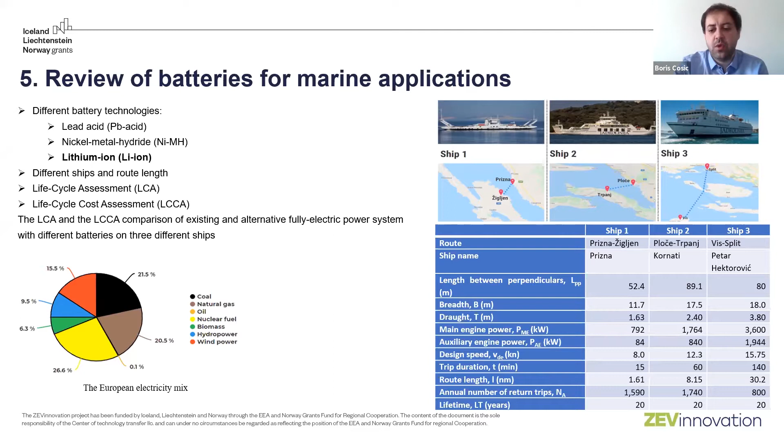We used the European electricity mix, so it's on the European level. If you go for the national level, of course, there's no problem. Our idea was to see how much everything costs, what the influence is, and to compare across different ships and different routes.

If you look at the CO2 emissions results, batteries of course reduce emissions. You don't have emissions from operating the ship, but you have a lot of emissions in production because we use the European mix. If you go to 100% renewable electricity, these CO2 emissions will probably be reduced.

This is the result of the analysis for ship 1, 2, and 3. As you can see, nickel batteries have a lot of SOX emissions because of the manufacturing process. The most important thing is also the LCCA comparison.

So you can see for ship 1, 2, and 3, operation costs are lower, but here we face the problem of battery size - it's like 8 megawatt hours for the batteries on ship number 3. This is the actual comparison between short and long ships, showing what happens when you analyze the system.

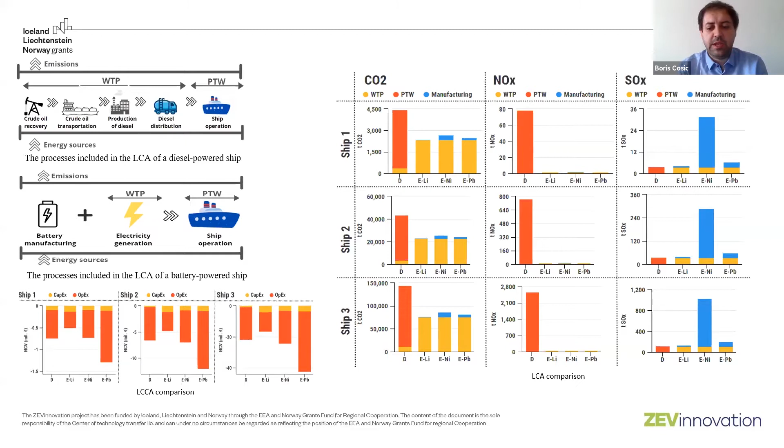Because of that, our next presentation will cover first electric ships, typically used for shorter destinations, and Anders will present after that batteries and hydrogen - how to work and design your system, and what other options exist beside batteries and hydrogen. So this is it for me for the introduction.

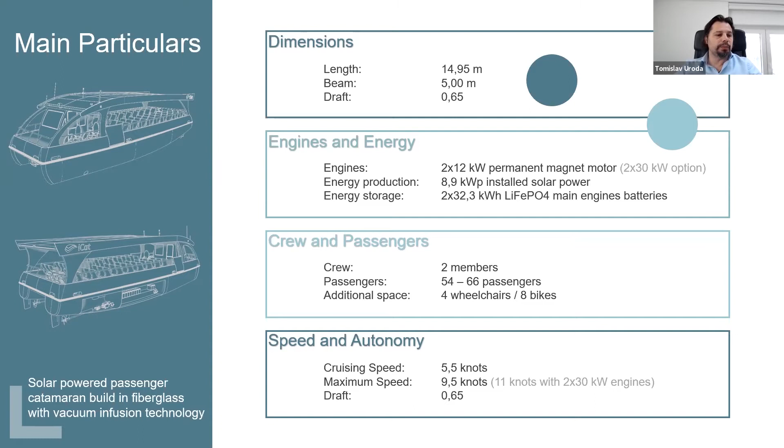That's mostly the speed of the cars, and sometimes it would be needed for improving the vessels as well. This small vessel is the Catamaran, 15 meters length, 5 meters wide, and it has small engines, 2 times 12 kilowatts. We can upgrade that to high power, but the basic idea here was to have a self-sustainable vessel. With those small engines, optimized hull resistance and the weight of the vessel, we have a cruise speed of 5 to 6 knots and maximum speed almost 10 knots.

On the screen here, you will see some data about this vessel. The name of that one was Baby Cat. Solar Cat is the third generation, which follows the Baby Cat vessel, as I told you before.

On the screen, you can see deliveries of new building number 2 and number 3. New building number 2 was delivered in summer 2019, and we have been sailing from Split to Mljet. This is a distance of 75 nautical miles. We were sailing 13.5 hours with an average speed of 5.5 knots, and the batteries at arrival remained at 50 to 60%.

Then we have the midwinter delivery. That was early January 2020. Same speed, not the same distance - the distance was 62 nautical miles, 11.5 hours of sailing, meaning sailing without stopping. And then we drained the batteries almost completely, some 90%.

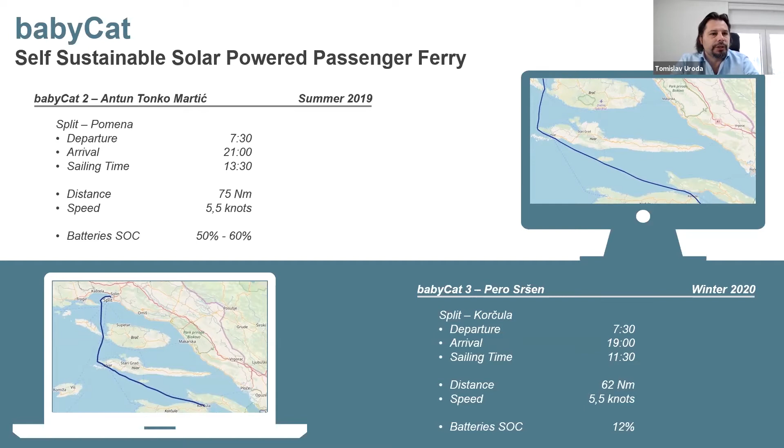The Solar Cat, which is the next generation of that vessel, has 30% more power in the batteries and 20% more in the solar panels. Emphasizing on those vessels is the solar energy. So they are sailing in a national park for some years already, and they never recharge them. The only energy they need, they get from the sun.

This is the second concept of the vessel we have designed, and that would be the next one for us. This is the fast electric ferry. That means we are not using solar energy here because the roof space is pretty small with regards to the amount of energy we needed for that vessel. But on this one, we have designed a speed of 25 knots as top speed, and then we have changed battery technology.

Aiming to have batteries which are able to have high C rates with regards to charging and discharging, that means you can recharge them in some 10 minutes of time, and that would be the time when you are boarding and in between some stops.

Such a kind of vessel is the vessel for short distance, meaning distance up to 20 nautical miles - but I would say not 20, more like 10 to 15 nautical miles. If we take a look at the Adriatic, it will be in between the islands. It will not be for the further islands we have in the Adriatic, but island connections in between. That will be the perfect ferry, or it could be part of public transportation. In Norway, that would be the fjord connections.

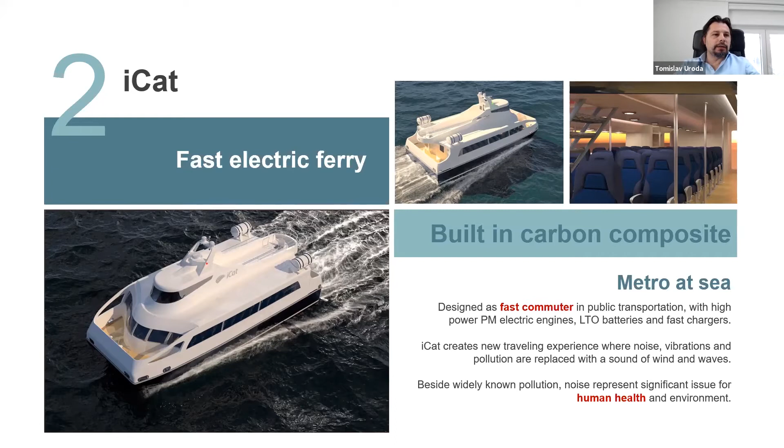On such a vessel, at this moment, with the technology we have, I would say this is the utmost you can use for the batteries. And then the third concept would be a combination of batteries and hydrogen. This is the project idea we are developing at the moment with the University of Zagreb, and it will be our third step.

The electric vessels are kind of more pricey than the normal classical diesel internal combustion vessels, and it's kind of similar with cars. If you're buying an electric car, it's twice the price of a normal car. And here it's very important - the message you are sending to the market and to the customers.

Probably didn't get the sound on it, but it's a short commercial about the electric car. Basically it's not promoting the electric car, it's saying what would happen if everything would run on gas—from general home appliances to all the systems. And then this is the market approach.

If you take a look at the past and quote some famous people, there's Henry Ford, who said, if I'd asked customers what they wanted, they would have told me a faster horse. Or Steve Jobs, who said that people don't know what they want until you show it to them. That's why I never rely on market research. Our task is to read things that are not yet on the page. I'd say the topics we're discussing now are right on the same track as those guys in the past.

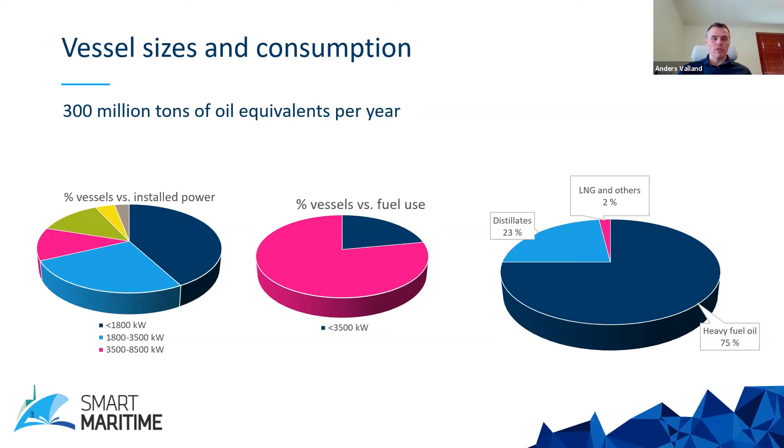And if you look at this small slice of 2%, LNG and others, that's where you find LNG, methanol, LPG, and batteries. You couldn't show batteries separately in this because it wouldn't basically show in this figure - it's that small yet. The other figure that's quite interesting is the middle one - it's set up as a percentage of which vessels have huge engines. It basically says that approximately 30% of the ships in the world use approximately 80% of the fuel, and these are the 30% biggest ships. So that's where we need to really get going if we want to reduce greenhouse gas emissions.

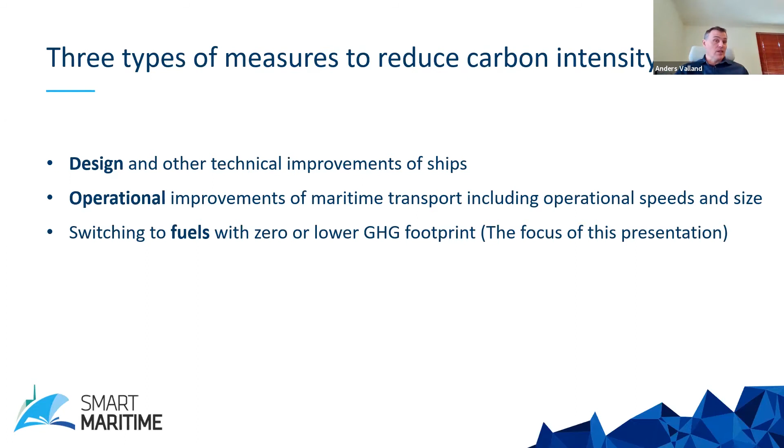Now there are basically 3 types of measures to reduce carbon intensity. You could do something on design and technical improvements of the ship. You could do operational improvements in how you utilize the ships and their capacity, or you could switch to fuels with either zero, low, or very low greenhouse gas footprints, for instance, as batteries. And this is what I will be talking a little bit more about.

It's also good to know what's happening with the International Maritime Organization and ship emissions and climate impacts. Presently they are regulating nitrogen oxides and sulfur oxides, and these are human health and local pollution issues.

And they're quite big. Shipping in total globally stands for about 15% of all local air pollution on this planet. 15%. While on climate gas, it's 3%, 2 to 3%.

The IMO prohibits deliberate emissions of ozone depleting substances, and it regulates CO2 emissions through the MARPOL Annex 6. And it's also important - the IMO regulations are on what we call a tank-to-wake basis. So it's the emissions that come from the ship alone, from the fuel that's on the ship, and that's what IMO is looking at.

But they are now getting under increased pressure to also include other gases than CO2 into greenhouse gases, for instance methane and laughing gas, N2O. And they're also under pressure to include what's called a life cycle analysis on the fuels on a well-to-wake basis - that is, from the production of the fuel all the way until the energy is dissipated through the propeller.

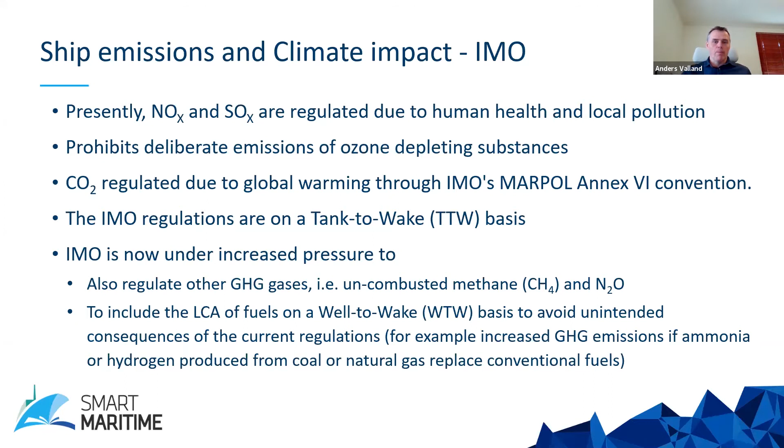So this is quite important. If you look at this figure, it illustrates the difference between what we call the tank-to-wake and the well-to-wake. Looking at tank-to-wake and CO2 only as IMO does today, and the well-to-wake looking at CO2 equivalents.

In the upper figure, you will see that LNG, for instance - and LNG is a highly debated topic these days - will give you approximately 24 to 25% reduction of greenhouse gas emissions compared to marine gas oil, if you look at the tank-to-wake and CO2 only perspective.

If you include what's known as the well-to-tank, so the production and distribution emissions for the fuels, you will see that the figures are different.

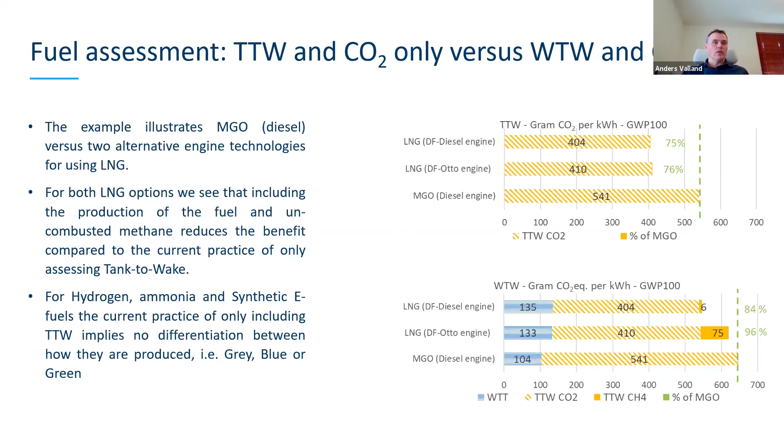So what we call the dual fuel Otto cycle engine on LNG has approximately a 4% benefit compared to marine gas oil, while in the previous figure it had a 24% benefit. While the dual fuel diesel cycle engine has approximately 16% benefit compared to marine gas oil, if you look at the well-to-wake, compared to what the IMO is doing today, where it looks like it has a 25% benefit.

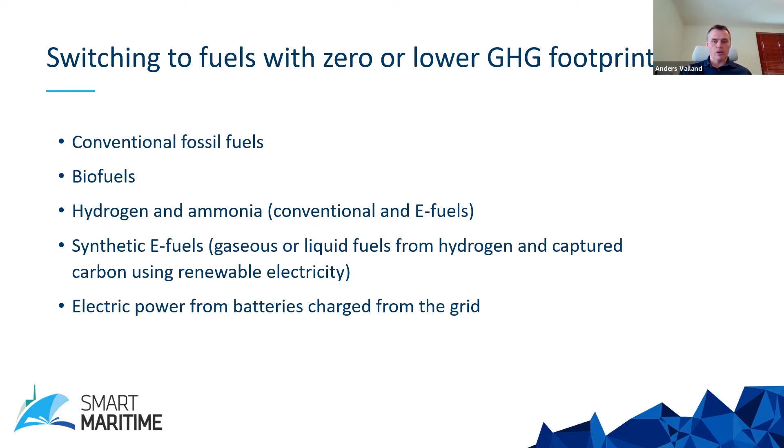Switching to fuels with zero or lower greenhouse gas footprints, we can go all the way from conventional fossil fuels - I've already shown you that some of them can actually give lower greenhouse gas footprints. We can look at biofuels, hydrogen, ammonia, and synthetic e-fuels, synthetic fuels, or electric power from batteries charged from the grid. Now, the electric power was covered in the other presentations, so I will not go much into that.

But I will try to show you some figures on these conventional fuels and how they can compare to what's going on today. So we're always comparing to marine gas oil, or low sulfur heavy fuel oil. In these figures, you see the vertical dashed green line is the marine gas oil on a diesel engine, and that's what we call the 100% - that's the emission basis that we're looking at.

If we look at a marine gas oil on a dual fuel Otto cycle engine, it has an increased emission because it uses more fuel. It's less efficient than the diesel engine. This is known. If we look at this picture, we also look at the different global warming potentials.

On the left side in a 20-year perspective, and on the right side in a 100-year perspective. So what's the difference? Well, methane, for instance, has a global warming potential which is higher in the 20-year perspective than in a 100-year perspective, because methane has a very short lifetime in the atmosphere. You release it, and within 10 years, most of it's gone. If you have CO2, the story goes that CO2 has a residence time in the atmosphere of more than 100 years, so it takes more time to dissipate the effects of it.

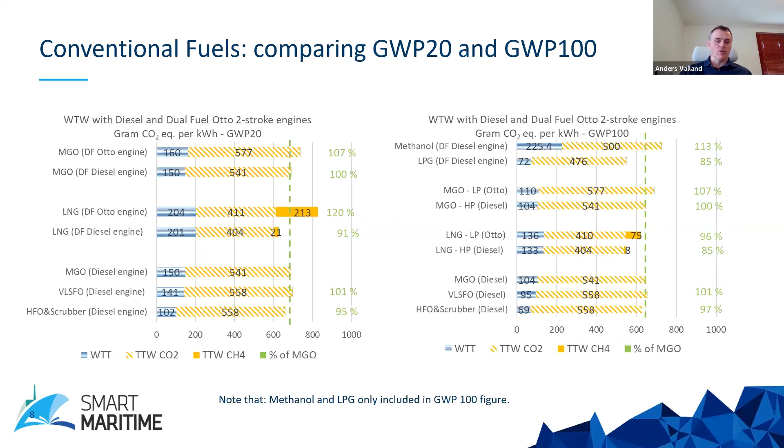I would like to just briefly dip into this engine technology side, because when it comes to the issue of methane slip, there are quite a few misunderstandings about it.

Methane slip is something that happens when you do not combust all of the methane that goes into the engine as fuel. This is typical for an Otto cycle engine, where you premix the fuel with air before it enters the cylinder. So the fuel and air is premixed, sucked into the cylinder, and then this combined gas is compressed. And what happens when you do that?

When you compress it, it tends to fill every crevice within the cylinder, filling up all the volumes between the piston and the cylinder wall, for instance, and it also migrates to the cylinder wall. Inside the cylinder, while combustion is happening fast, the cylinder wall is relatively cool, and that's where it is hard to combust methane. In all these crevices, you have a richer mixture of methane with air that you cannot combust.

So when the combustion is over, you open the exhaust valve and expand the gas, and this unburned methane will follow the gas through to the exhaust side. That's what is called methane slip. That happens typically in Otto cycle engines, and it's relatively unavoidable.

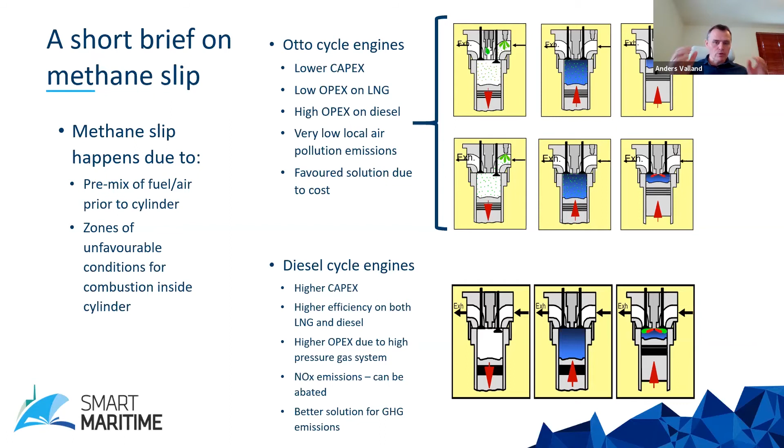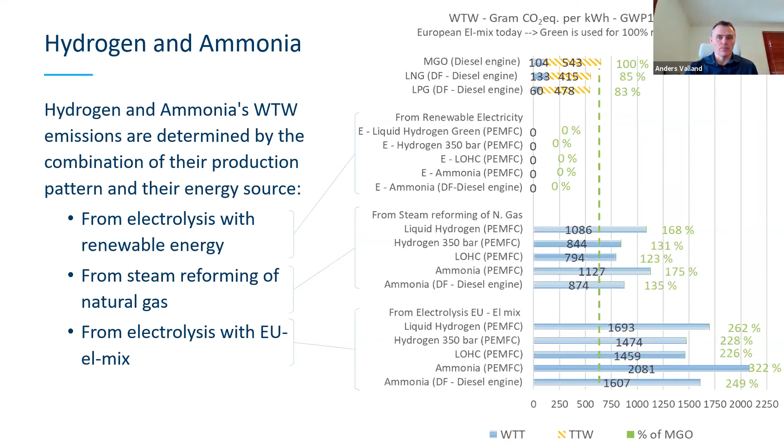If, however, you look at the situation today where you steam reform hydrogen from natural gas, hydrogen will give you a higher total greenhouse gas emission if you use it today as is. And if you use electrolysis on the EU mix of electricity, you get very much higher emissions—more than double your total greenhouse gas emissions from using hydrogen or ammonia today as it is. This is trying to show the difference between starting to use it today and what might be possible in the future if we are able to produce everything from renewable electricity. That's a question I will get back to a little bit later on.

So what about these synthetic e-fuels? E-fuels are made from hydrogen and carbon dioxide, blended in a synthesis process and made into a hydrocarbon. So you can design the hydrocarbon—you can make a gas or you can make a liquid.

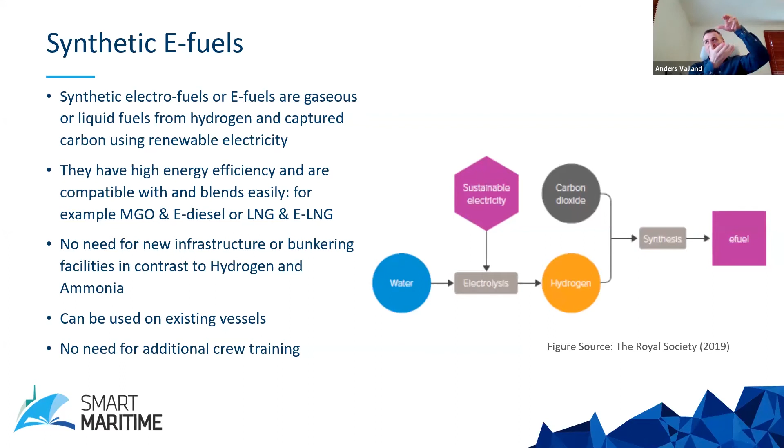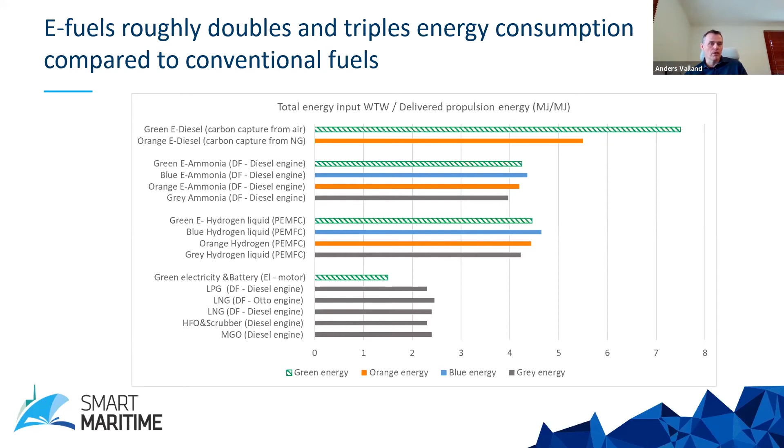This is an important slide because it shows the amount of energy you put into your fuel compared to the amount of usable energy you get out of it. So for every unit of usable energy you get out, this is the relative amount of energy you put into the fuel. If you compare our current suite of fossil fuels—almost 98% of all fuels used in shipping is fossil based—if you go to hydrogen or ammonia, you double the energy input to get the same amount of usable energy out. And if you make synthetic fuels, you triple the amount of energy input to get the same usable energy out.

There has been a lot of work done trying to estimate the future cost of these fuels. If you look at the fourth IMO greenhouse gas study and the Lloyd's Register and UMAS studies, today in the high price estimate, compared to current fuels which we set at 1, LNG is about 25% higher, hydrogen and ammonia are 4 times higher cost, and synthetic fuels today are about 10 times the cost of very low sulfur oil. But if you look into the future, taking into account that the main driver of cost difference is the energy input, these figures become 1 for very low sulfur oil, 2 for hydrogen and ammonia, and 3 for green diesel.

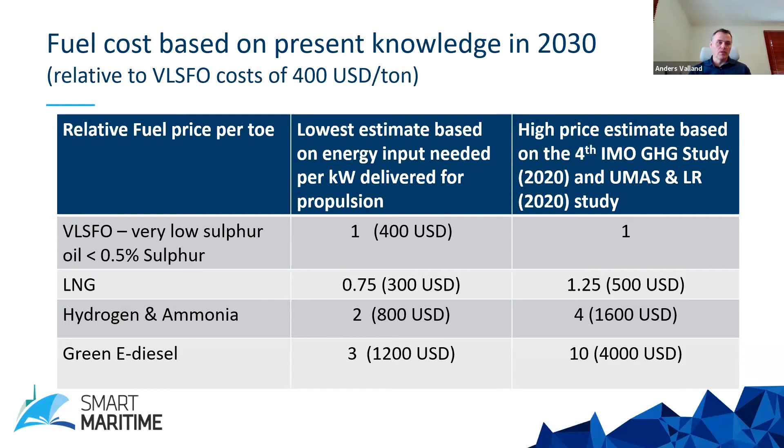So what are the pros and cons? Hydrogen and ammonia are expensive fuels, and they will always be, because they require a lot of energy input. What is not so much on the table when discussing hydrogen and ammonia is that risk levels will increase compared to what we're operating on today—even when you do the right measures, it will increase. You require new and complex infrastructure on board; you cannot use anything you already have, you have to have new stuff on board. And you also require everything onshore in production, distribution, and bunkering.

Infrastructure has to be brand new—you have to make everything all over again. You have to design the vessels differently because hydrogen has a very low energy content. You cannot gradually introduce this because you cannot blend it with what already exists. It requires a totally new business model for shipping, and the higher cost is both in the fuel and the infrastructure.

If we go the way of synthetic fuels, they are even more expensive than hydrogen and ammonia—they require 3 times the amount of energy, whereas hydrogen and ammonia require 2 times the amount, so it's 50% more expensive in terms of energy input. But the risk levels are exactly the same as today, because you're producing a hydrocarbon you're already using. It uses the exact same infrastructure on board—you can use the exact same engines, the exact same pumps, tanks, and so on. And for distribution, production, and bunkering onshore, it's the exact same—you don't have to make anything new.

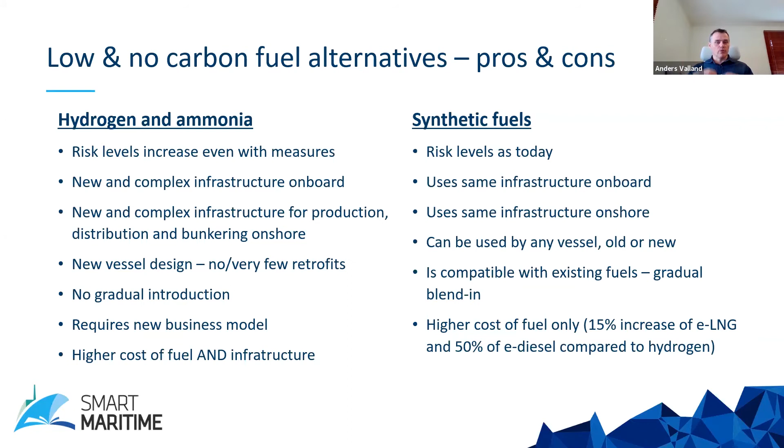I have two more slides, I think. The question here is, these figures show the total amount of fossil-based energy produced in 1990 and in 2018. It increased from about 8,800 million tons of oil equivalent to about 14,000 million tons of oil equivalent between 1990 and 2018. Coal actually increased its share from 25 to 27%, while oil decreased its share, and natural gas increased its share. You can see all of the renewables have basically moved just slightly.

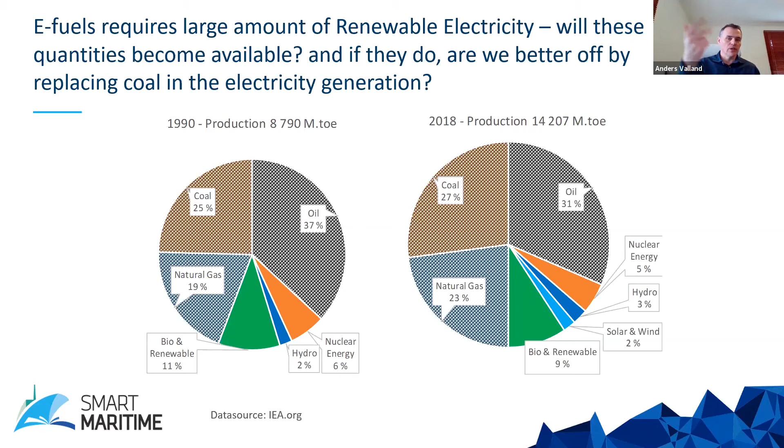So the question is then, if we are going to produce everything from renewables, and everyone else is going to remove oil, natural gas, and coal with renewables, how are we going to make that happen? Just as an input to discussion, if you take the figure as is today - this says 400 million tons of oil equivalent used by shipping, though I said 300 earlier - if you want to change that to e-fuels, you would have to use 710 million tons of oil equivalent in energy, which you could take from renewables.

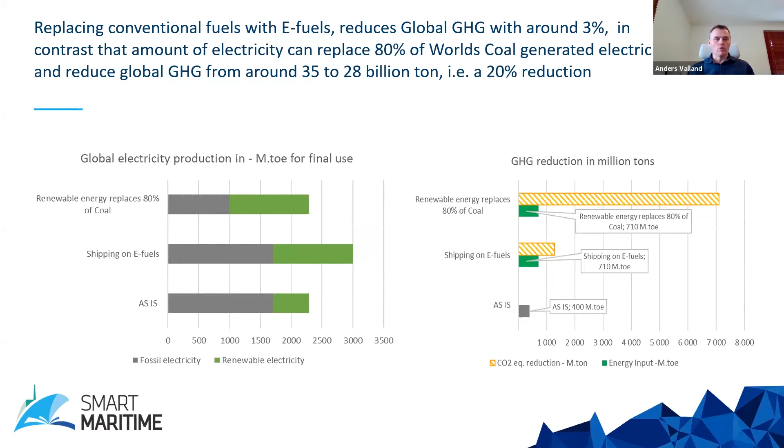If you do that, you would reduce global greenhouse gas emissions by 3%. If you took the exact same amount of energy and replaced coal-fired electricity production instead, you would reduce global greenhouse gas emissions by 20% for the exact same input of energy. We think that's an important aspect to keep in mind when looking at what kind of solution you're going to go for in the future. Thank you, that was me.

Okay, thank you, Anders. Very good presentation with a lot of information. One question arises from your presentation: nowadays everyone is talking about the production of hydrogen, so people are not familiar with the difference between green, blue, gray, and orange hydrogen. Could you please give some explanation? You had that slide, so it will be good to show it, because everyone thinks that hydrogen produced from natural gas or from renewable electricity is the same, but in European legislation it's not laid out the same way, so it's not the same. Please give a short explanation about hydrogen.

Yeah, this is the slide you were talking about. Basically, it's true, there is no real consistent way of talking about these things. But if you look at the different publications on these issues, people tend to say that gray hydrogen comes from steam reforming of natural gas without any handling of the CO2 emissions that come from it. So that's gray hydrogen or ammonia.

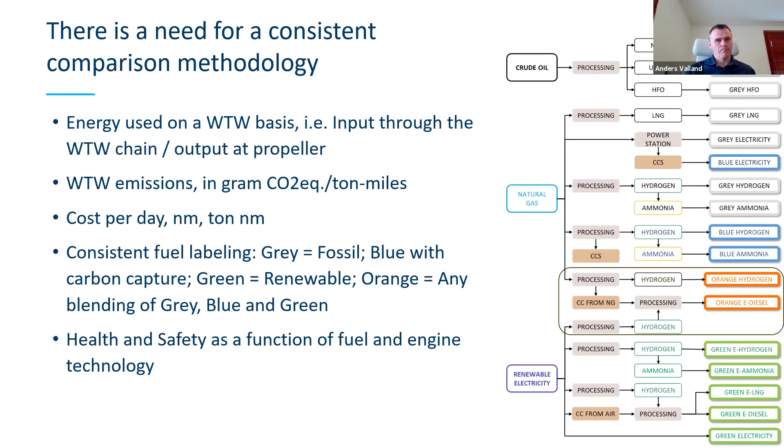And then we made the orange color as well, just to confuse everybody, because it's any blend of the gray, blue, and green. So if you are blending from different sources, then it's orange. I hope that was a little bit clarifying. Yeah, that orange is also new for me, so I didn't know about orange hydrogen - I'd heard of blue, green, gray, but we see that from time to time there's a mix of sources for hydrogen and ammonia.

Okay, so one more question - they said there are 100,000 merchant ships on the market. What is your opinion on the order book of zero-emission ships? How long will it take to replace the fleet with zero-emission vessels?

Well, I think that first of all, the maritime industry is very good at sticking to regulations. So if there are regulations and heavy penalties for using the wrong type of technology, the maritime industry responds and starts using the right type of technology. They have shown that time and time again - they have a very good track record. If you put regulations in place, you get the results. So basically, if everybody just agreed that everything should be, let's say, 50% better by 2030 or 2040, it will happen, because the maritime industry is very good at making it happen.

Right now, as you say, the number of ships in the global fleet, there are a lot of them. Tomislav was talking about electrical vessels. If you look at what DNVGL tracks of electrical and battery operated vessels in the world, it's numbering in the few hundreds. I think it's around 400 or maybe 500 ships that have batteries in some form, some all electric and some hybrids using diesel machinery with batteries. If you compare that 400 or 500 ships with batteries on board to the 100,000 total, you get an idea of where we are. We are just starting, and it's important to realize that.